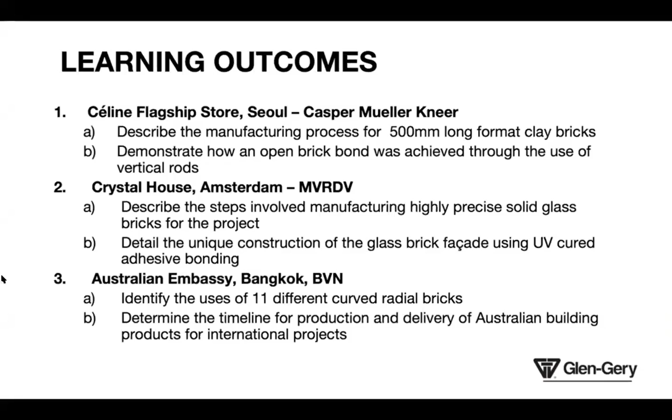Lastly, we'll take a look at the Australian Embassy in Bangkok, designed by BVN, identify the use of 11 different curved radial bricks for that project, and determine the timeline for production and delivery for products used in international projects.

Okay, so our first project here is the beautiful Celine building in Seoul. Much of the information here comes from our manufacturing partners in Italy, San Anselmo, who were instrumental in assisting with this project. Thank you to San Anselmo for providing a lot of the detail for this presentation. Starting out with some facts about the building.

The project is the Celine flagship store located in Cheongdam in Seoul, South Korea. Two predominant architecture firms worked on the project: Casper Mueller Kneer from London in the UK, and Heian Architecture, the project architects in Seoul, South Korea. The manufacturer was Fornace San Anselmo, located just outside of Venice in Italy, and the client was Louis Vuitton Moet Hennessy, who owns the Celine brand.

This is a 7-story mixed-use building that was finished in January 2017. This is a flagship building for Celine, a 7-story mixed-use building with a stepping mass, which is unified through this simple brick envelope.

The brick used is a light-colored bespoke terracotta unit that is laid with a complex bond pattern using different lengths and opening types to create a veiled brick skin. This resulting brick skin resembles a veil, part open, part closed, providing transparency and displaying a variety of different lighting conditions as the sun travels through the building and animates those spaces inside.

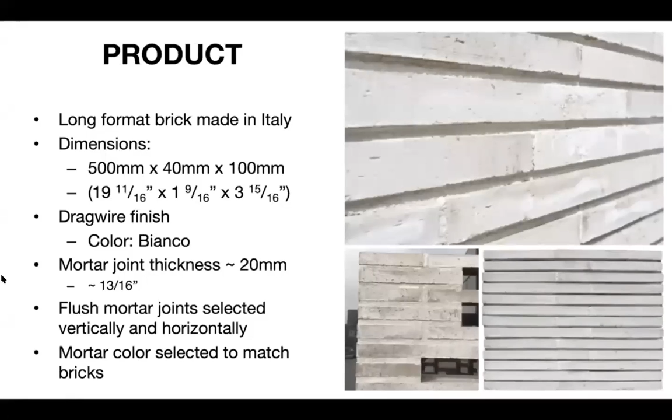So they really wanted to have this one monolithic look and feel to the building, where the brick and the mortar blend together to create one continuous looking surface that's only broken up by these perforations in the brickwork, which create voids for light to flow through those spaces.

So describing a bit of the manufacturing for the bricks here. The San Anselmo long format bricks are handmade in Loreggia in Italy.

What happens when these bricks are made is the brickmaker forms slabs of clay into these wooden molds. Each brick is made individually with different surface finishes applied afterwards to create different textures and colors on the surface, using water, sands, different cutting wires, or glazes to create different looks and textures for those bricks.

Because the clay used to form these bricks is so soft and the bricks are such a large size, this process cannot be automated. So it needs to be done one by hand, with love, by these brickmakers in the factory in Italy.

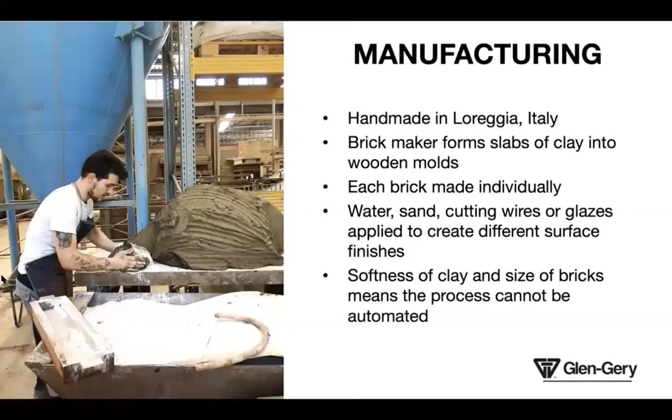The bricks are then hand stacked onto shelves for drying. You can see each brick individually stacked on its shelf for drying prior to being fired. This is to make sure that all the necessary moisture is evaporated from those bricks prior to firing, and they're laid out individually on racks to avoid any warping that would potentially occur if they're stacked together.

So this is one of the extra details that needs to happen when making these large format bricks: being careful to dry and fire them in such a way to avoid any warping or distortion of the shape. They're fired at over 1,000 degrees Celsius or 1,800 degrees Fahrenheit, and can be produced in a range of different finishes.

So water struck or a standard soft mud or smooth finish, a Selmo soft mud or textured finish, or an extruded smooth finish as well, depending on what the architect requires for their project.

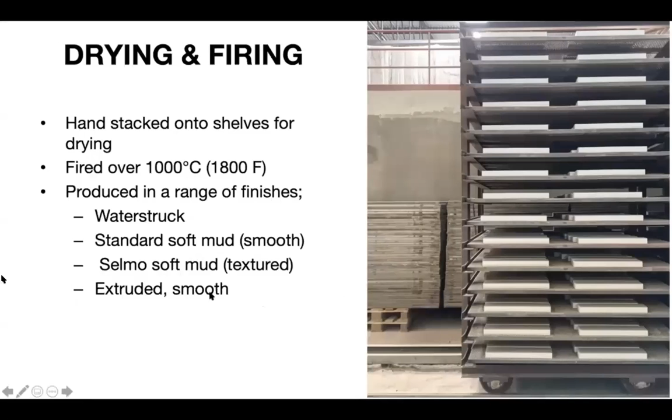And that's the final product that you see there. These long format bricks at a nominal 20-inch length have that beautiful handmade characteristic and long format that is quite unique.

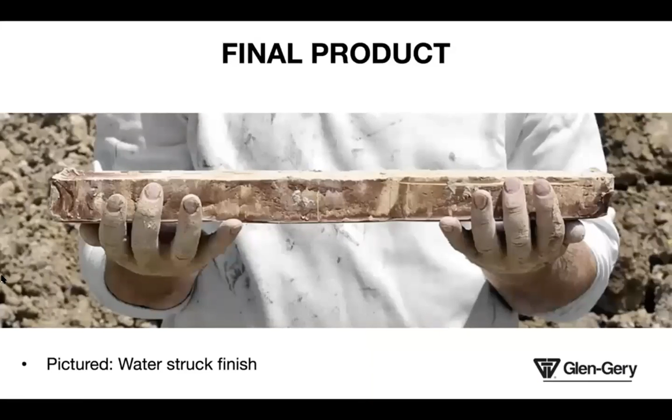Having a look at the bond design for the project now. There was a significant amount of collaboration required to achieve this intricate bond pattern for the project, a joint effort between San Anselmo engineering team and Casper Mueller Kneer architects.

What they were doing here was retrofitting the facade system to be installed 420 mils, or 16 and 9/16 of an inch, from the existing load-bearing wall. So this facade was essentially being suspended off the existing load-bearing wall of the project to create more interest than what was there previously.

There were some challenging design considerations for the project. Seoul is located in an area with significant seismic regulations where it can be prone to earthquakes. So local seismic regulations required L-shaped shelf angles to anchor the brick at each story, and vertical steel rods to connect those bricks as well.

The steel rods must not be seen through the open bonds, so that created some challenges that needed to be worked through to see how you could vertically support those bricks through these steel rods and not interfere with this desire for this light and airy veiled facade that they wanted to achieve.

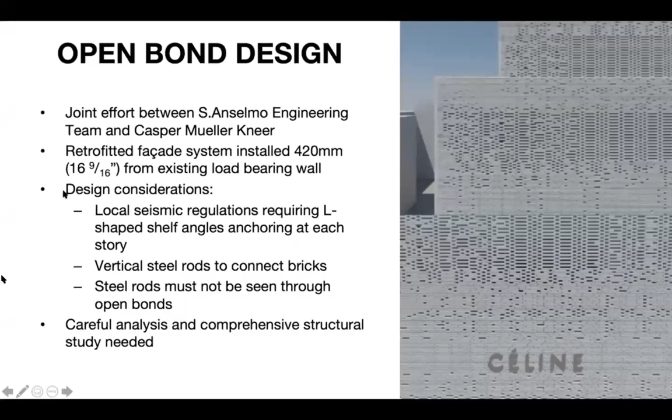So careful analysis and comprehensive structural study was required in order to achieve this facade in that particular location where seismic regulations were very important.

In order to do that, a few prototypes were built. Having a look at how this ended up being constructed, the bricks were designed with voids in them in the core of the brick that would allow for the use of a vertical reinforcing rod. Here you can see the prototype being built, showing how those rods fall into place.

I'll show a little video that demonstrates how that works here. You can see the bricklayer dropping those bricks with the core holes over those vertical suspension rods and mortaring them into place.

Quite a long video, so I'll skip just to a few different key sections to highlight some of the details of how this worked. You can see him dropping those bricks down over those rods and leveling off the brickwork.

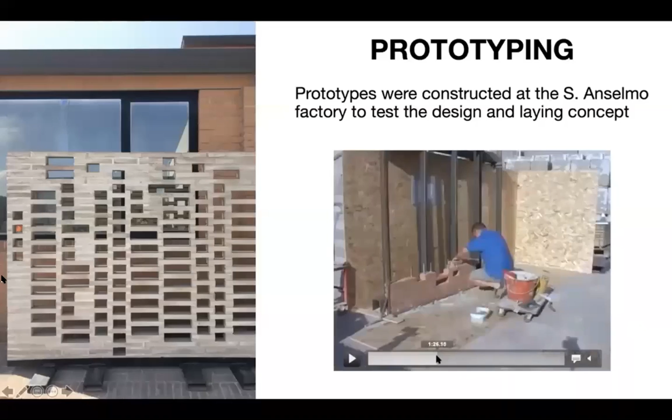Coming down over those reinforcing rods, working up to the full height of that reinforcing rod length, and then at the top you can see these connectors being screwed into place. Rather than dropping brick down over the full height of that reinforcing rod, which would be the full height of the story of brickwork they're constructing, they've done it in shorter sections about a foot and a half in length. So you're not dropping those bricks so far down over those rods, making it a little easier to construct and a bit more buildable than it otherwise would have been.

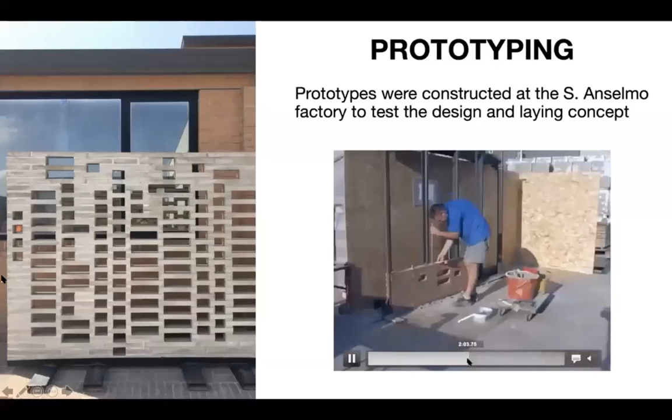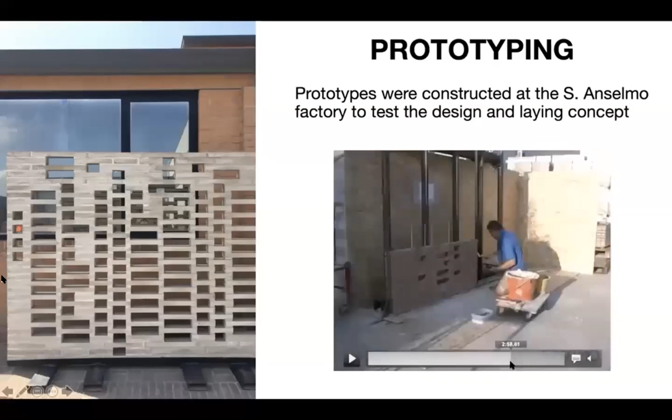You can see him going through there adding those next sections of the reinforcing rod, and then again laying that brickwork down over those reinforcing rods to create this vertical reinforcement that allows for this construction to work under these particular seismic regulations.

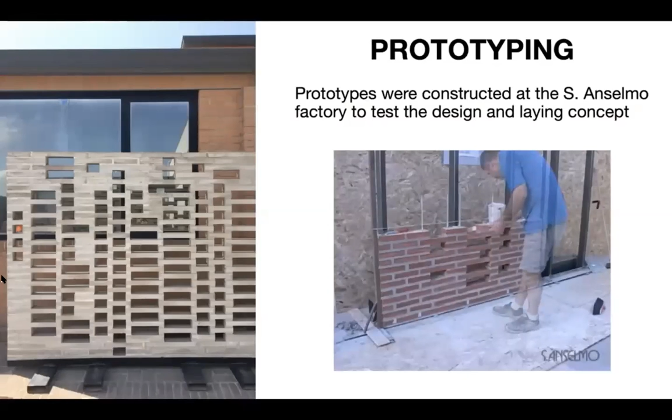There we go, and that's the prototype. That system worked very well - a nice, simple way to allow for this vertical reinforcement that doesn't interrupt that open bond pattern, which was a very important part of the facade detailing of this project and the thing that really sets it apart.

In order to produce those units and allow for this facade to be constructed, 3 different lengths were required. Those cored bricks were produced at a 500 mil length, or 19 and 11/16 inches; a 360 mil length, or 14 and 3/16 inches; and a 220 mil, or 8 and 11/16 inches. These are the 3 different lengths used on the project.

They also included 13 different brick types to allow for positioning of vertical rods - bricks with 4, 3, and 2 different holes, and without any holes, at both the 500 mil and 360 mil length bricks. The 220 mil brick had 2 holes in different positions depending on where they were required in the facade. So 13 different brick types were used in this intricate brick facade, and each brick was imprinted with a code to identify the type and position.

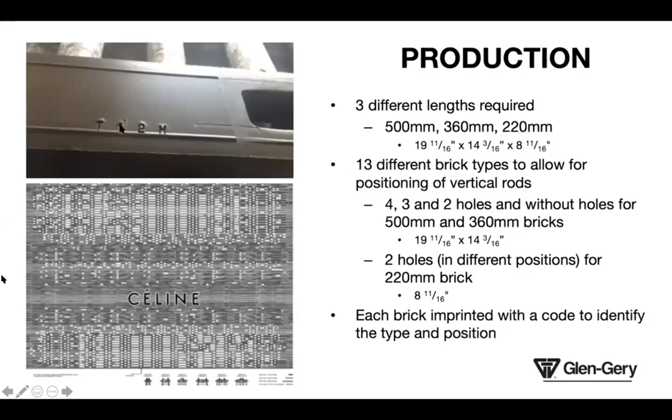Here you can see the T12H brick, and that allows the bricklayers to identify where this brick would be required in the facade.

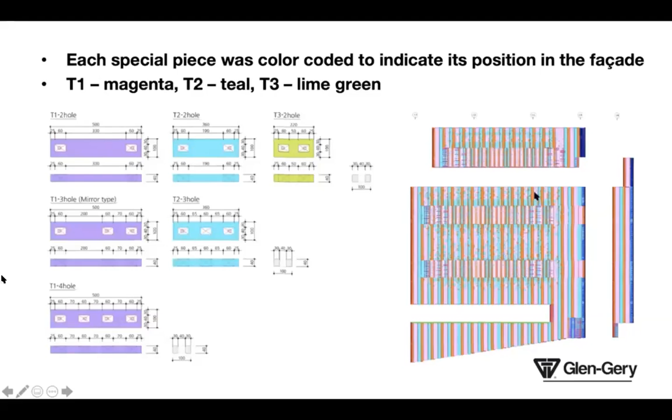To aid in construction, each brick was color-coded in the drawings to indicate its position in the facade - T1 shown in magenta, T2 in teal, and T3 in lime green. You can see the different positions for those core holes: a 2-hole, 3-hole, and 4-hole version in the T1 length depending on the degree of reinforcement required and where it's used, a 2-hole and 3-hole version in the T2 length, and a 2-hole version in the T3 length, allowing those rods to be inserted through those core holes in different positions in the facade.

Suspended bricks were used in areas where the base of the brick is visible. This is something architects regularly come to us to look at different solutions for, finding ways to still show the appearance of a full brick in soffit areas, the underside of window sills, or brick ceilings. They included that detail on this project across the T1, T2, and T3 brick length types.

Installed off the shelf angle, this stirrup allows these suspended bricks to be secured back up to that shelf angle, making sure this piece is mechanically fixed to the shelf angle and is a structural part of the facade, while also providing the appearance of a continuing piece of that brick facade - creating a nice architectural detail underneath the brick skin, where you get this continual brick surface wrapping around.

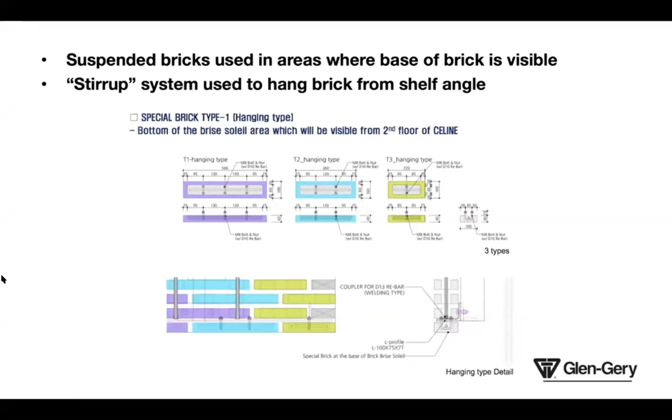Very nice detailing there. They refer to this type of brickwork as a brise soleil, which is like a sun veil, allowing the brick to create this light and shadowing effect, allowing breezes to flow through. I also hear it called hit and miss brickwork, one of the other terms often used to describe this type of brickwork.

Where you've got openings in the brickwork creating this void effect. A brick facade construction manual was provided to the local bricklayers on the project. Each morning those bricklayers were given a page from the manual with specific instructions for each day's work. The manufacturers at San Anselmo supervised the initial phase of installation as well, to make sure the right bricks were going in the right places.

So what you can see here is a page from that manual showing the different courses to be constructed that day, the color coding for the different length units required, to show which section they needed to work through for the day and which bricks needed to go into which positions.

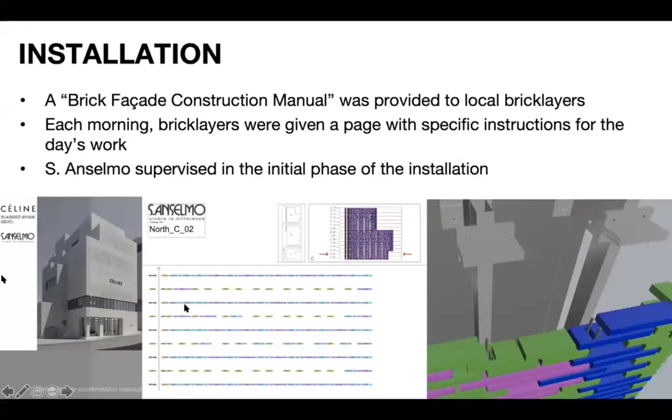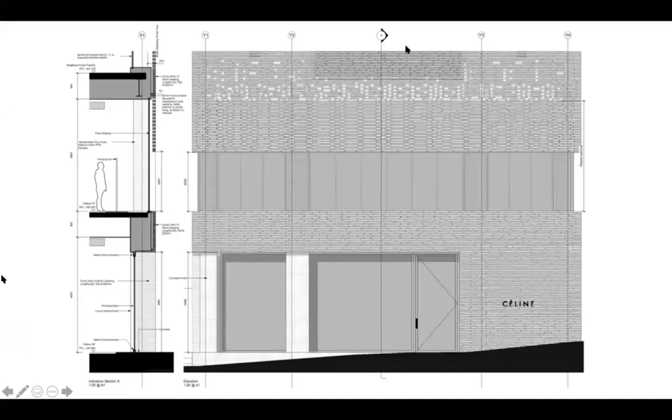You can see an elevation and section of that facade showing how that brise soleil or brick veil is suspended off the existing facade, creating this light, airy brick veil, which is interesting to see in a material that is so typically perceived as being heavy. It creates this perception of lightness with the way that it appears to hang and allow light through.

Another detail there showing the section and elevation, and you can see the brickwork where the locations are for all of those vertical reinforcing rods in that structure as well, that allows for it to be constructed in what looks like such an open bond that actually has these vertical reinforcements to hold it in place and prevent it from destabilizing.

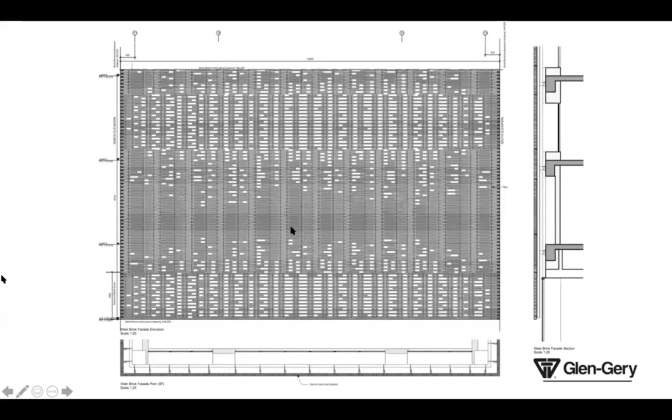One of the things that does typically make brickwork very strong is the way that it interlocks, forming a strong interlocking net. By opening up the brickwork, you're destabilizing that bond. So by ensuring these vertical rods are reinforcing the brickwork, they're making sure that it will be stabilized and will not move through any of those seismic movements that can occur in South Korea.

Here are some shots of the brickwork as it's being installed on site. The vertical rods were welded to that L-shaped shelf angle on the slab level of each floor as it's under construction. Each vertical rod was 8 feet in length and threaded so that they could be joined with a long bolt. As we saw as they were constructing that prototype, they had this threaded rod with this bolt at the top that allows each rod to be connected to the next one above.

Given those thick mortar joints compared to the thickness of the bricks, there was a limit on the number of courses that could be laid each day with fresh, undried mortar. To help this process and speed it up, a neoprene spacer was used between the bricks to support the weight, as that mortar is drying and curing, allowing construction to continue.

The first story was hung on those L-shaped horizontal anchors so that from below, no anchoring system would be seen. Those stirrups were installed so that you wouldn't see the bottom of that L-shaped anchor. You would just see the surface of the brick, making it look like one continuous material as it goes up.

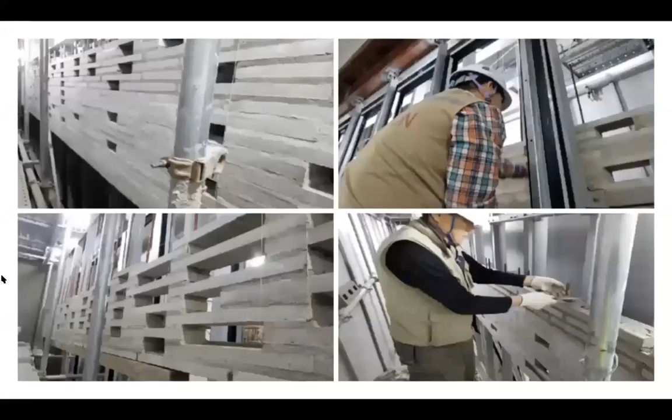A few more shots from the brickwork as it's under construction. You can see the bricklayer here screwing on that connecting bolt before starting the next story, and the thickness of those mortar joints that has that Roman look to it.

Seoul has some of the most beautiful brick architecture, particularly modern brick architecture. I'd love to get over there and visit a few of these projects. This one in particular is absolutely stunning.

Okay, moving on to our second case study. Our next project is Crystal Houses, designed by MVRDV.

Much of the technical information here comes from an academic paper, 'The Construction of Crystal Houses Facade, Challenges and Innovations,' by Oikonomopoulou et al., published in the Journal of Glass Structures and Engineering in 2018. The research was conducted by the TU Delft Glass and Transparency Lab, whose permission to republish the results is gratefully acknowledged. MVRDV and Gietermans and Van Dijk are responsible for the architectural design, ABT for the structural simulations, Wessels Zeist for the construction of the facade, and Poesia for the manufacturing of the glass bricks.

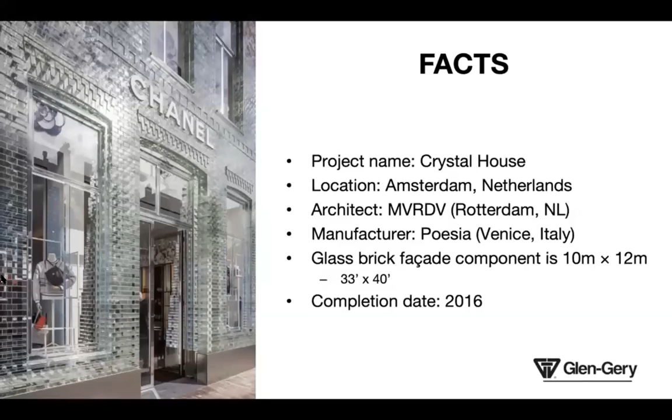The product used on the project is the Venetian glass bricks. The finish was a polished finish with custom-made cast glass elements for windows and door frames. They even had custom-made cast glass door handles.

So even the doorknobs are made from solid glass. Everything on this project that they could make glass, they made it out of glass. It's an absolutely beautiful project. Over 6,500 solid glass bricks were used on the project.

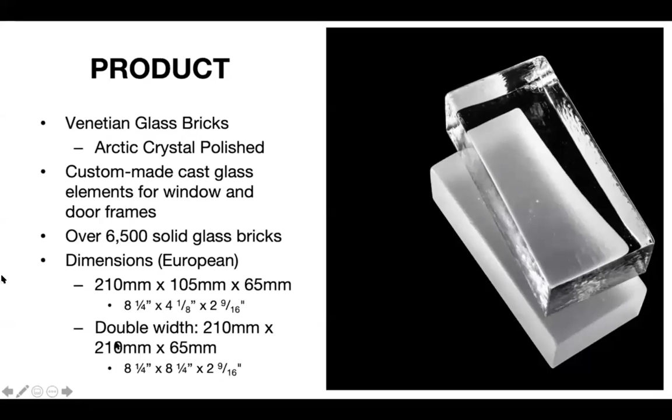They were predominantly two dimensions, based on a European format, which is 210 by 105 by 65 millimeters, or roughly 8 1/4 inches by 4 1/8 inches by 2 9/16 of an inch. They also had a double width brick, which was 210 by 210 by 65, or 8 1/4 by 8 1/4 by 2 9/16 of an inch. So one single width and one double width used to create the patterning of this glass brick facade.

So what the architects designed was a stretching of the facade upwards that allows them to make the most of that new height they could use in that area, while still maintaining Amsterdam's traditional architectural style. The innovative facade follows the original 19th century elevation down to the layering of the bricks and the details of the window frames, which is stretched vertically to comply with those updated zoning laws and allow for increased interior spaces.

As it ascends, terracotta bricks intermingle with those glass bricks, gradually transforming the glass elevation of the traditional brick facade onto the upper floors. It's almost like the building has been pulled upwards, and that glass brick at the base of the building is the space that's being created by pulling the building upwards from the roof.

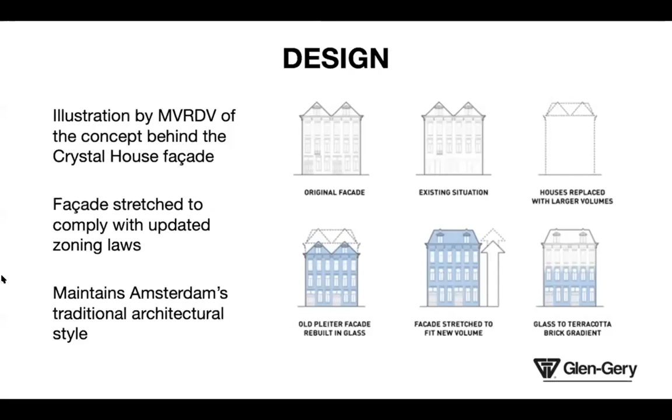In order to achieve the design intent for the project, three factors defining the structural performance and transparency level of the facade needed to be considered. At that point, they were looking at a choice between a hollow or a solid glass brick.

Now, the most important thing the architects wanted for this facade was to make sure that it was as transparent as possible. By having a polished solid glass brick, you're getting the most transparent type of glass brick you can get on a project. Any kind of voids or inclusions in that glass will diffract the light as it's flowing between the bricks, and you will see that you don't get the same level of transparency. You get almost a translucency with other types of glass finishes or other types of glass brick units.

The choice between a structural adhesive bonding or a supporting substructure was also considered.

A supporting substructure, as seen on other glass brick projects, would typically use vertical and horizontal steel reinforcements. But that would impede the transmission of light through the glass bricks. They wanted this facade to be as transparent as possible, so avoiding any supporting substructures was critical, which meant they would require some kind of adhesive bonding to create a structural monolithic facade manufactured with these glass bricks.

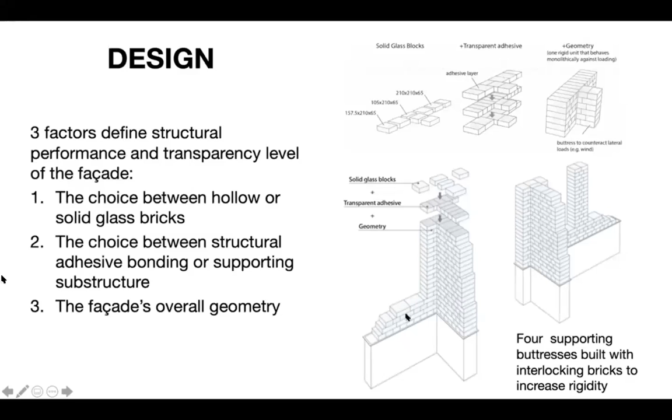Moving on to how these glass bricks are made. Each brick is made individually by pouring molten glass into high precision open steel molds. A low iron glass recipe is used to allow for high optical quality. The steel molds are preheated to a constant temperature of 650 to 750 degrees Celsius to allow for a smooth surface texture.

What they're looking for here is what we call a Goldilocks temperature - not too hot and not too cold. If the mold temperature falls below 650 degrees, the hot glass comes in contact with the metal surface and freezes instantly, creating a rippled and wavy surface. If the mold is heated above 750 degrees Celsius, the glass can stick to the walls of the mold and be more difficult to release.

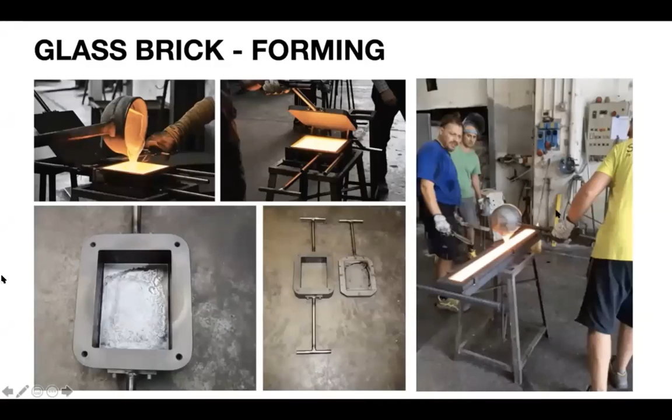You can see a bit more of the production line of those glass bricks as they move through that rapid cooling phase. On the left here, you can see those high precision open steel molds used to create the glass bricks. On the right, the molten glass bricks during the rapid cooling phase as they cool down to ambient temperature. You can see the color of the molten glass cooling as it rapidly goes through that process, from that gold, glowing molten look through to the fully transparent glass you would see at the end of that production line.

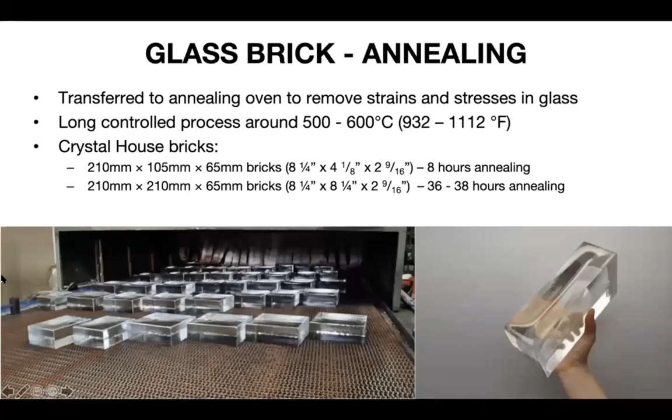Next, those glass bricks are transferred into an annealing oven to remove stresses and strains in the glass. It's a long controlled process around 500 to 600 degrees Celsius, which is around 932 to 1112 degrees Fahrenheit. Depending on the size of the glass unit required, there are different annealing times necessary. For the single width brick, they needed to be in the annealing oven for 8 hours, and for the double width unit, they needed 36 to 38 hours to fully ensure those stresses and strains are removed from the glass.

Next up, we'll start talking about the laying of those glass bricks. A bonding agent was required to adhere these bricks together as they wanted the facade to perform as a monolithic unit, like one solid single piece of glass. To do that, they needed to work with a particular transparent adhesive that could be used to glue those bricks together.

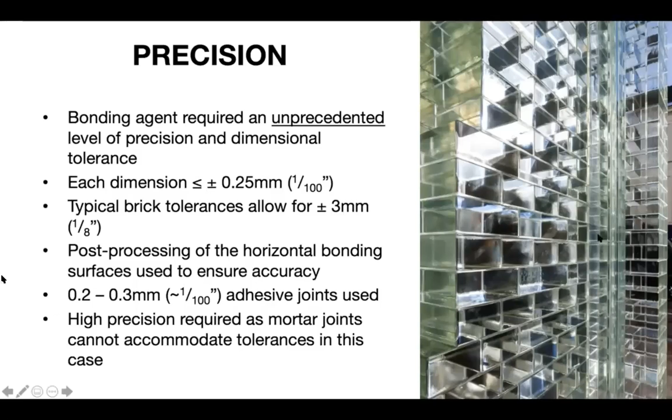A little bit more about the adhesive used on the project. The adhesive used was DELO Photobond 4468. It is a colorless UV curing 1-component acrylate designed for high strength bonding between glass components, and that material allows the facade to perform as a single rigid monolithic element.

It has a similar refractive index to glass, which was very important as they wanted there to be no appearance of the adhesive in those joints between the bricks. So you can't see this adhesive in those joints. It has the same look as the glass on either side.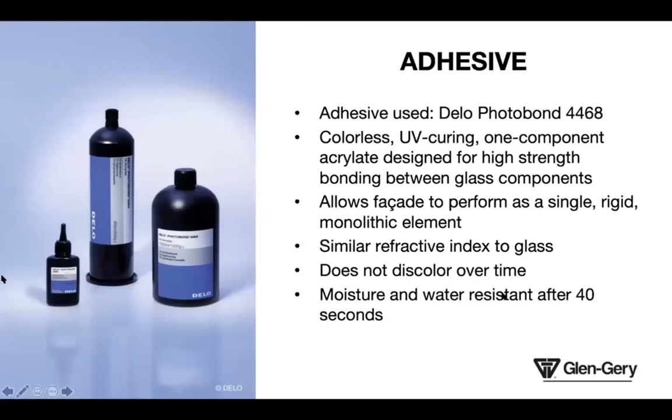It does not discolor over time, and it is moisture and water resistant after 40 seconds. This is another challenge you can see on projects where they want to use silicone mortar joints. Some silicone joints will discolor over time, especially if exposed to a lot of sun or UV light, starting to yellow. By using this particular adhesive, they were able to ensure that the joints between the bricks would always look as good as they did on the day they were laid.

Moving on to the construction now. The upper conventional masonry facade was built first. This piece at the top of the wall was the first piece done, supported by a steel beam spanning the length, with a highly skilled building crew and strictly controlled construction - 7 to 9 skilled workers working 12 hours a day, 5 days a week, bonding and sealing on average 80 to 100 bricks per day, constructed within a UV filtering tent to protect against solar radiation, weather, and dust.

They really didn't want any dust or dirt sitting inside the layers between those bricks, causing little inclusions visible inside those joints. It was also built on top of a reinforced concrete plinth, on a commercial street of Amsterdam with lots of retail stores right against it, and cars and bikes traveling regularly. So they wanted to make sure the glass wasn't used on the absolute ground level of the construction. They had this concrete plinth in case any impact occurred - the glass bricks were above the point of impact.

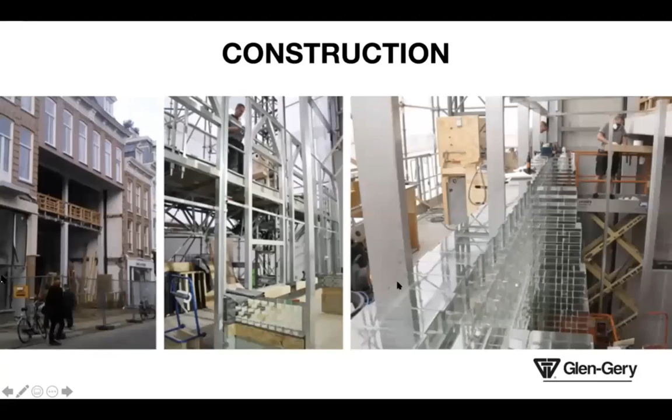Next, you can see the bonding of those bricks. From left to right, you can see this X frame that was used to provide the pattern for the adhesive. That frame was taken away, and you can see the X pattern resulting from that in the adhesive. The adhesive was UV cured with a UV beam initially to prevent capillary action, and then a UV lamp used to cure the adhesive for 60 to 120 seconds afterwards.

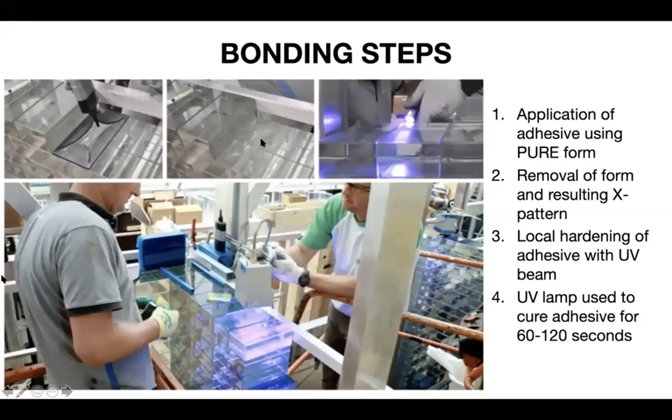Only the horizontal elements on this project were bonded. The vertical were left open, allowing for thermal expansion of the glass on the facade. So this X pattern allowed for when the next brick is laid on it, the X flows outwards, allowing for that thin adhesive joint to be laid.

Next, you can see where the bricks transition into the clay for the facade above, transitioning from the glass to the clay to create this nice gradient effect. The challenge in doing that was there are different mechanical properties and variations in acceptable tolerances between glass and clay units, and different bonding required between brick types and different adhesives.

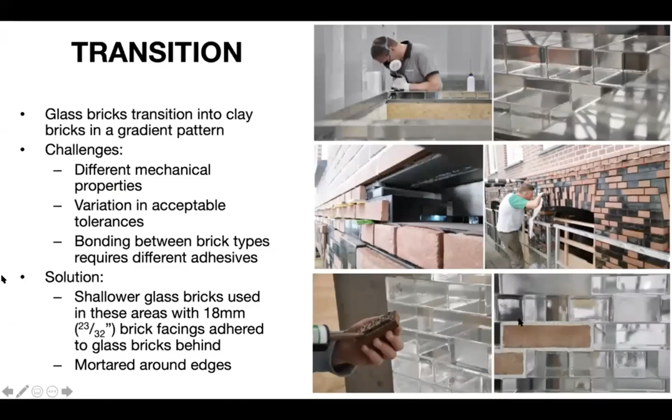These clay bricks like to be mortared together, while these glass bricks are being adhered. So what they did to get around that was create some glass brick units that were a little shorter in the wall, which allowed these clay units to be adhered in front of that glass unit. They're not actually intermingled, they're just designed to appear that way, with these clay brick facing units adhered to the glass to create the appearance of that transition.

And there we go - that is the completed project as it stands today on the streets of Amsterdam. Actually, it's not exactly how it stands today, as a few years after Chanel moved in there, it changed hands and is now the home of Hermes, the flagship store for Hermes in Amsterdam.

Okay, now the last project we'll chat about today is the Australian Embassy in Bangkok. Starting off with a few facts about this project: this is the Australian Embassy Bangkok in Bangkok, Thailand, designed by BVN architects from Australia, manufactured by Bowral Bricks in Australia, built by Bouygues-Thai VSL. It was a 194 million dollar construction for this project, completed in 2016, with an architect team led by James Grose, Peter Clark, and Asher Galvin at BVN.

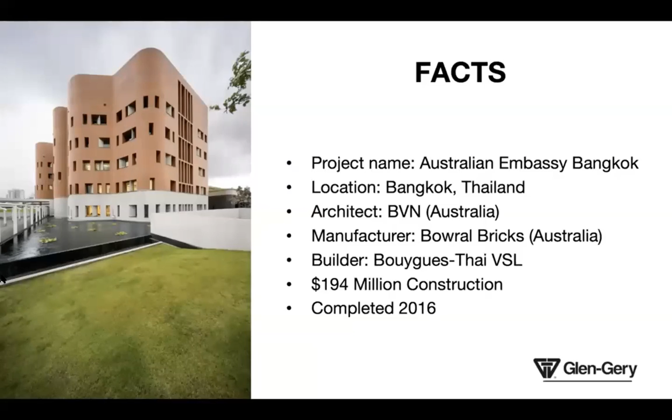So why did they need a new embassy in Thailand? The Department of Foreign Affairs and Trade conducted an audit of embassy buildings globally to check for safety and the risk of terror attacks on these DFAT buildings. Embassies typically have a 50-year lifespan. The old embassy was completed in 1979, designed by Ken Woolley, but had been noted to have some security flaws in the design. This new embassy became the fourth largest diplomatic mission in the world for Thailand, as there is a significant amount of foreign affairs and trade between the two nations.

Brick architecture has a strong history throughout Thai culture, used extensively with these It Mon Dang bricks used in Thai temples and various construction projects around the country. So they're a very popular type of brick in construction in Thailand.

A few details about the products used on this project. It was a dry press brick using three different colors: red, blue, and gray. Designed in Australian dimensions, so this project is on Australian soil in Thailand, made with Australian bricks with Australian dimensions. Australian bricks are a little larger than typical US bricks, at 230 by 110 by 76, which is a 9 1/16 by 4 5/16 by 3-inch unit. The closest size I can find is probably a handmade oversize, which is most similar to the Australian brick dimension.

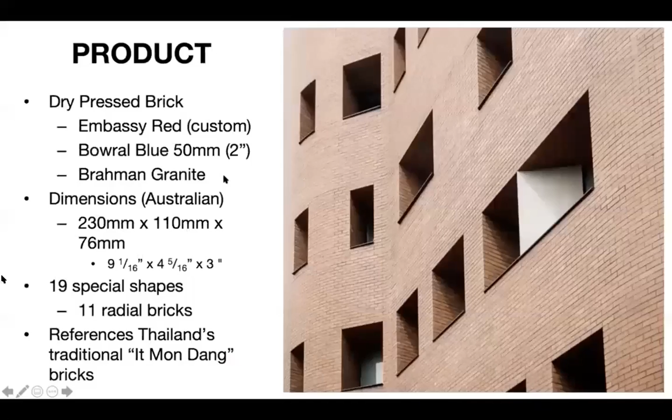Having a look at the design, the embassy was designed to be a piece of Australia in Thailand, using Australian materials and a colour palette directly inspired by the outback. The red brickwork and the unusual shape create a silhouette reminiscent of Australia's great landmark, Uluru.

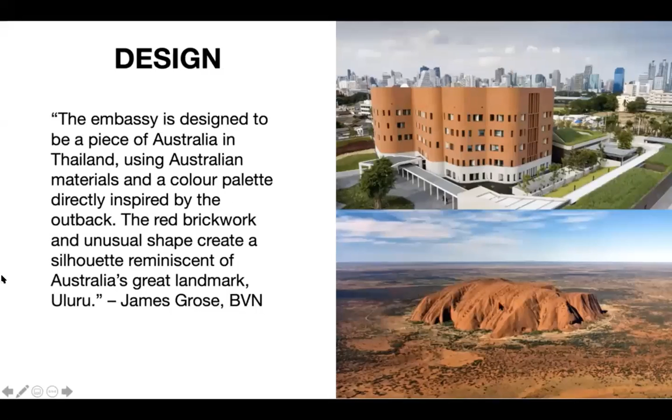According to James Grose, this was the reason for the design. When you look at the building as it sits in the landscape of Bangkok, it is this big red rock that really makes you think of Uluru, that big red rock out in the middle of the outback in Central Australia. So it has that evocative feeling of Uluru. I definitely get that impression from how it looks.

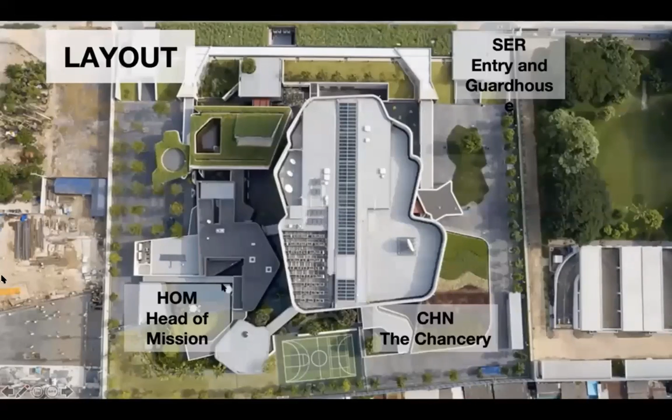A few details on the layout of the building. This is the main embassy building here, which is the chancery for the Australian embassy. There are also two other buildings used in the embassy: the entry and guardhouse at the front here, and also the head of mission, which is the ambassador's quarters.

Having a look at some of the special shapes now, these are all of the different radial bricks used to form the curves of the building, ranging from 4,775 millimeter radius down to a 595 in the blue colored brick. There are also some squints and mitered bats used to form different angles on the project as well.

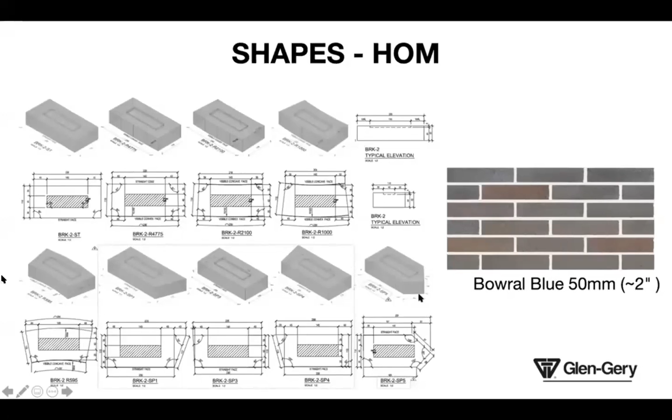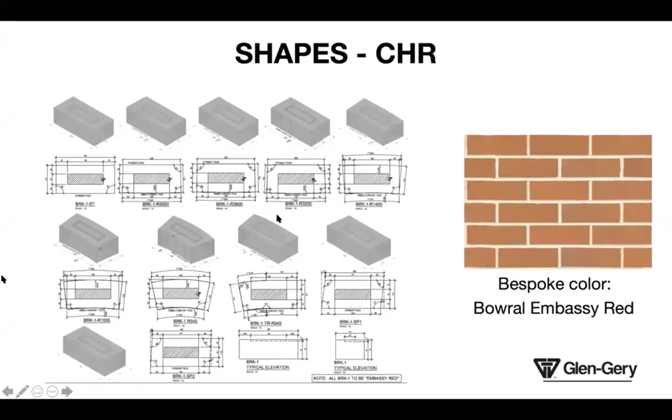In the red color, again, you've got a whole range of different radiuses, from a 5,000 millimeter radius down to a 545 millimeter radius, and a trapezoidal brick, which is used in some areas to form the curves, and this transition brick as well, which is used to transition from a curved wall to a straight wall using a brick that is half curved and half straight. Lastly, for the guardhouse, there was no special shape used, just the standard brick unit.

Having a look at the project in plan here, you can see how those different radial bricks are positioned to form this curved structure, this curved facade, which uses all these different radial bricks to form these gentle curves around the perimeter of the building. From a 5,000 millimeter radius, which is a really subtle curve, down to that 545, which was the smallest radius used on the project for these tight internal radial curves that you see here.

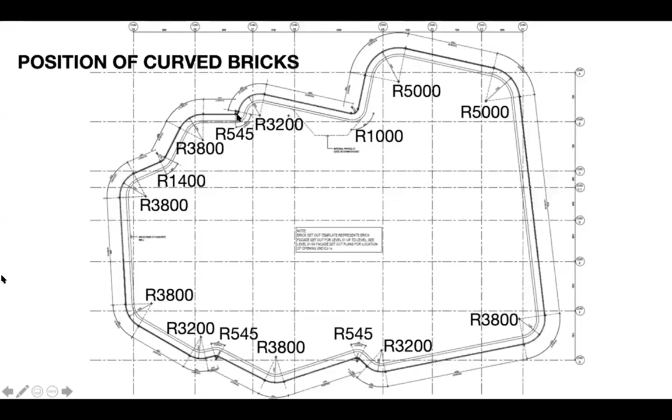Supplying bricks for international projects requires a tight fabrication schedule. Having a look here, you can see the schedule for the brickwork: construction of a variety of mock-ups, training of the Thai bricklayers to lay this particular facade, and from a manufacturer's perspective, creating a stockpile to create a bespoke colour, doing different trials on the colour to achieve this deep earthy red that the architect wanted, accepting that colour from the architectural team, tooling the different dies to make the special shapes, production of those different bricks, testing to make sure they meet the codes and standards required for the project, shipment from Australia to Thailand, and then delivery to site.

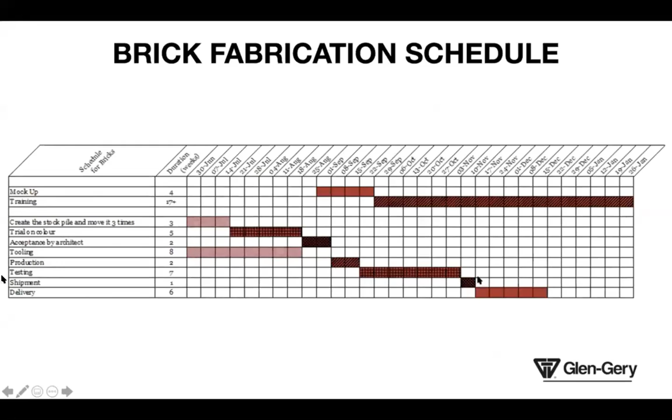So different colour trials were used to create the different colours for this building. The red in particular was a new colour that had never been made before, really wanting to evoke the red earth of the Australian outback, called the Embassy Red. It has this beautiful earthy red tone. This also shows the range of acceptable colours for that brick, ranging from a slightly lighter orangey tone to a deeper red. Similarly for the blues on the project, from a brownish blue through to a deep, darker blue.

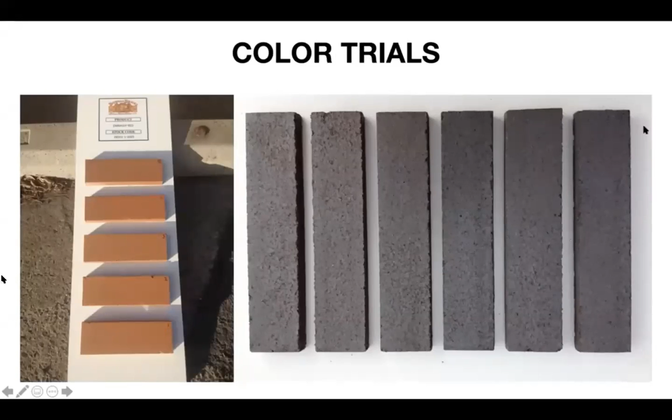In order to produce these special shapes, molds were made out of case hardened steel. On the left is the mold for a 595mm radius brick, quite a tight curved brick. What's nice about these bricks is you can use both the internal curve and the external curve to create two different radiuses depending on how they're designed to be used. To allow bricklayers to know which bricks needed to go in which positions, the radius was pressed into the frog of the brick. Here you can see R595, showing it's a radius 595 brick, so they know where it needs to go in the building.

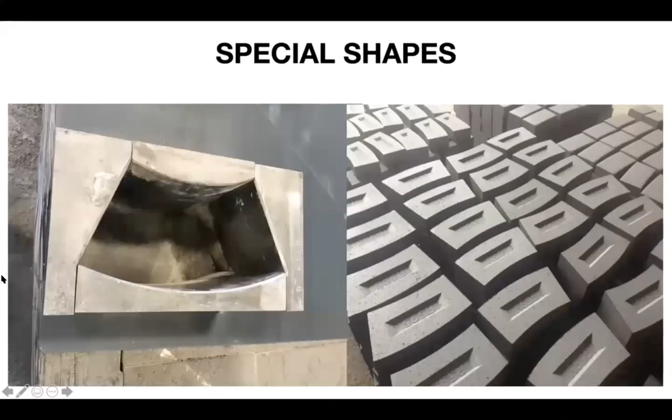The facility that produced these bricks is a highly automated facility. One of the challenges of creating a radial brick like this is that there are no rectilinear surfaces, no straight edges, so a robot that would typically pick up bricks at the edges was unable to lift these bricks. What was done for this project was the use of suction heads. These were installed on the robots to suck up the bricks and move them from the production line, allowing them to be transported safely without any chippage or breakage.

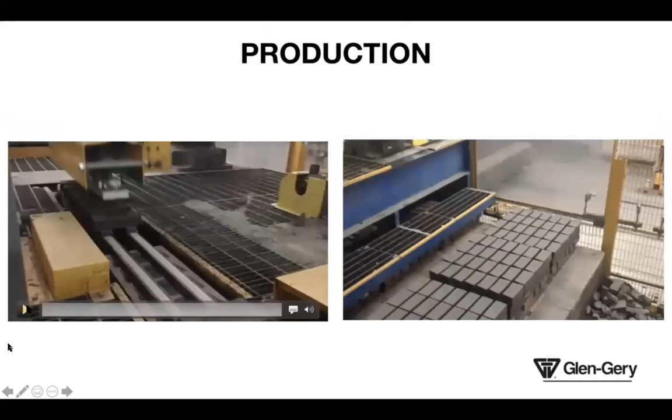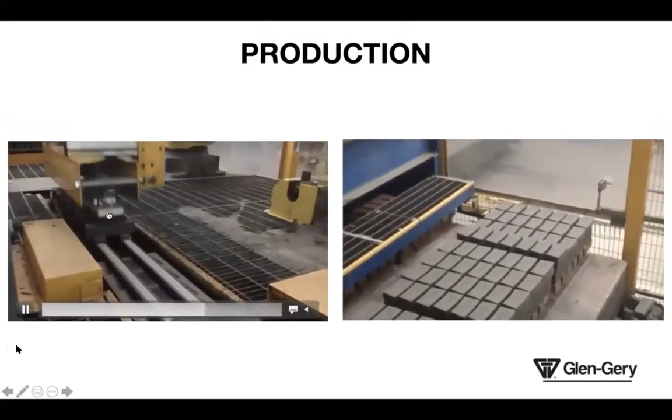I'll show a few little videos here showing those bricks being transferred using those suction heads. You can see the suction head dropping the bricks down there, picking them up here, and moving them safely without any chippage.

It's a highly automated facility, meaning there is no hand labor on site, so it's all fully automated. The first person to touch the brick is the bricklayer who handles it on site. There's no human contact with the brick up until that point for this particular factory.

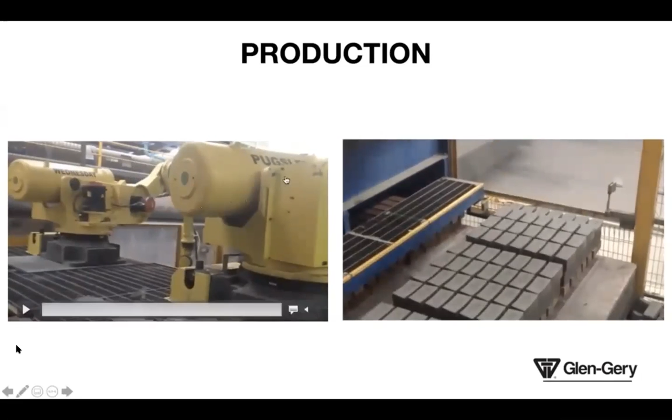And a little bit of trivia about barrel bricks: all of the robots are named after the Addams Family. You can see Wednesday Addams and Pugsley Addams, the two robots shown in this video.

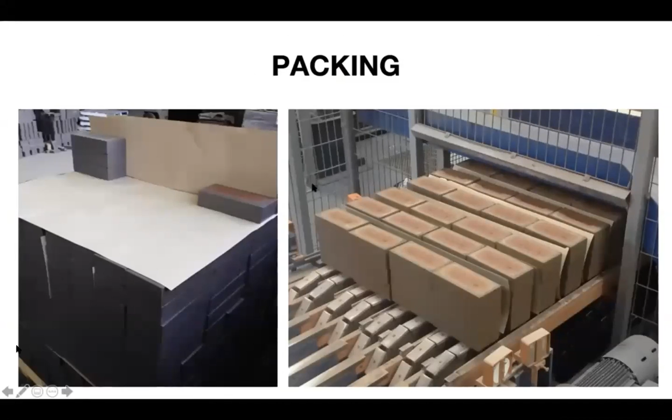Moving on to packaging. The challenge with sending bricks from one country to another is that they're heavy, they knock against each other, and they rub. To prevent that for this project, layers of cardboard were used between each layer of brickwork and between courses of special shapes, to prevent them from knocking against each other and rubbing during transportation.

Prototypes were also built for this project. You can see here they're prototyping, checking the curvature. This is a little visual mock-up, also checking the soffits where the bricks are installed under the windowsills, checking that detail as well. Looks beautiful.

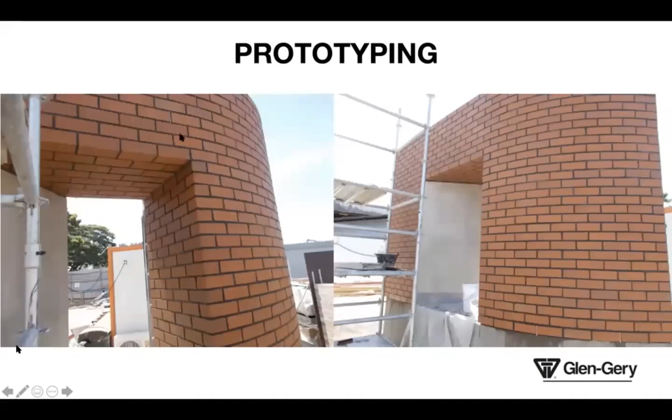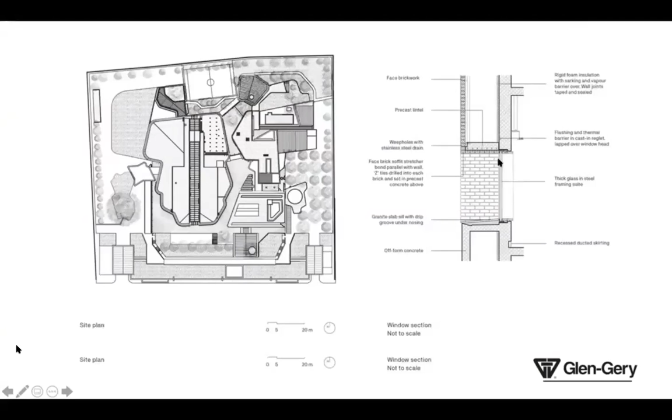The walls of this project are very, very thick, which you saw in that last image, the depth of those window reveals. The project needed to be blast proof to avoid any blast that could occur. They have a 1 foot wide concrete shell forming the structure of the building, with the bricks as a facade only, not a structural part of the embassy itself.

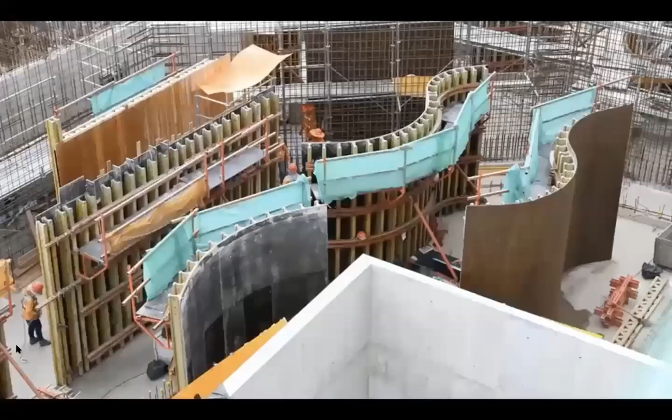The walls had to be blast proof, so the concrete was typically a foot in width, with the total wall buildup of the concrete, the cavity, and the brick over 3 feet in width, forming this secure embassy shell. That's the formwork there, used to create the curves in that concrete on the project.

And moving on to the bricklaying. One of the biggest challenges was there was a largely untrained Thai labour force required to produce work to Australian codes and standards for the project. Thai construction relies on large numbers of manual labour rather than technical innovation, creating great pressure on quality control. So a large international construction team with many different cultural backgrounds had to work together to construct this in Thailand to codes and standards from Australia. The bricklayers did an incredible job on this project, meticulously laying these different curves in the building and making sure every detail was to Australian standards. They did an exceptional job, the Thai bricklayers on this project.

And interestingly, many of the bricklayers on the project were female. Female bricklayers played a major role in the construction of the Australian Embassy in Bangkok, where 3 South Australian bricklayers led the build, training and supervising that Thai local workforce. The contractor for the project employed over 600 construction workers, with almost half of that workforce being women. Rather than simply being involved in the lighter tasks, the women were firmly embedded in the construction process, from steel fixing, scaffold assembly, to concreting and formworking.